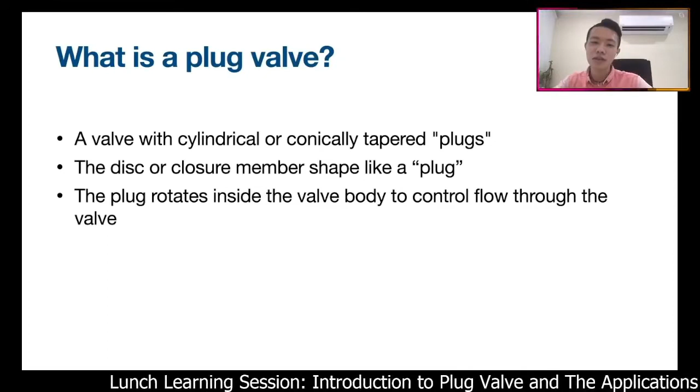Normally you see the closure member of a ball valve is a ball, a rounded closure member. So it's called a ball valve. Same for the plug valve, the disc is shaped like a plug inside. I will show the pictures later, hopefully you can have a clearer picture about that. The plug rotates inside the valve body, same as other valves, to control the flow through the valve.

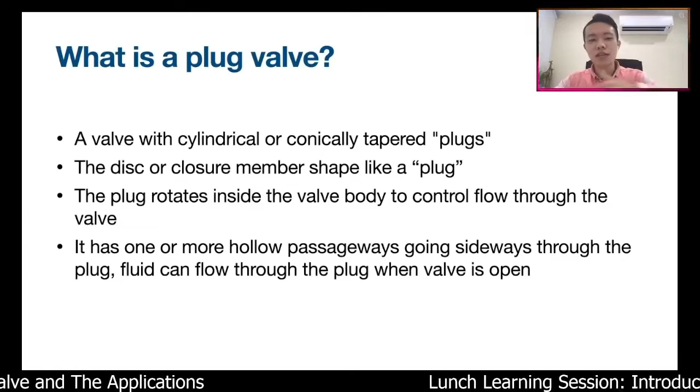The plug actually has a hollow passageway in it, going sideways through the plug. So when the plug valve is open, the fluid can flow through the valve, through the passageway. Okay, so let's have a look at how a plug valve looks.

Okay, let me just confirm that everyone can see. I see Wai Chong saying, okay, got the plug in the middle. Yes, that's correct. So now you can see there's a tapered plug in between. I don't think my pointer is showing. You can see from the cross section here, the plug valve has a plug as the closure member.

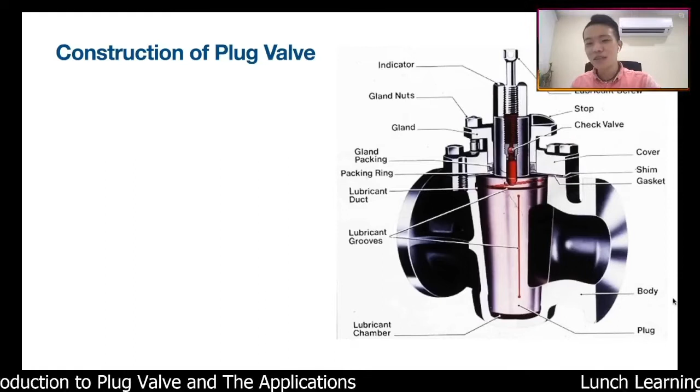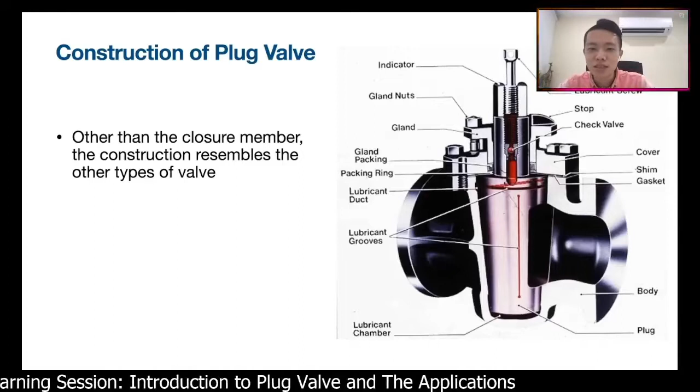Other than the closure member, the construction also resembles other types of valve. You can see here, the valve has the body, the stem attached to the plug itself, as well as the covers and the flanges. It's standard to all other valves. It consists of body, seats, stem, packing, and closure member, which we normally call the disc.

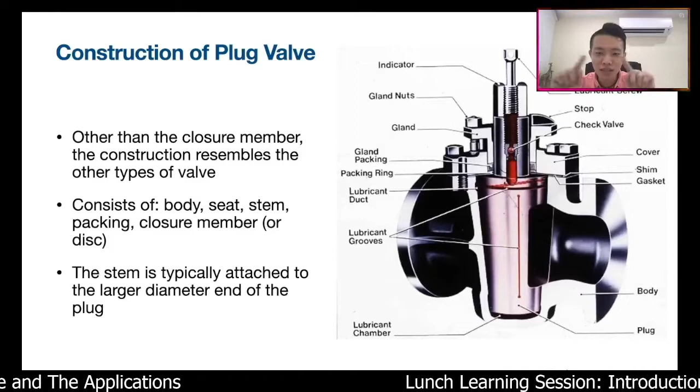The stem is typically attached to the larger diameter end of the plug. You can see the plug is tapered down the valve, so the stem is attached to the larger part of the plug itself. Okay. This should be a clearer picture so you can see it when the valve is open.

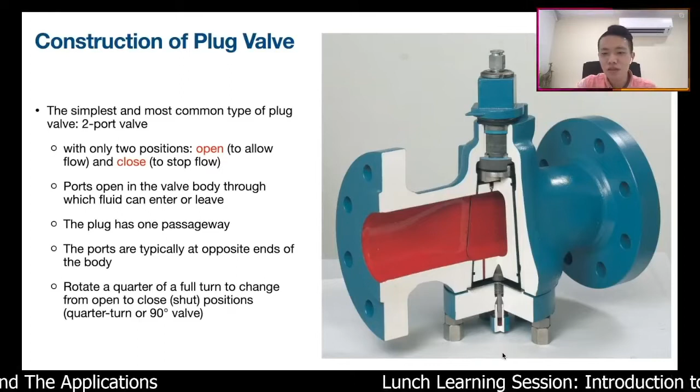The ports are typically at opposite ends of the body, meaning when there is a hollow passageway opening over here, there is another opening on the opposite side of the plug. Because the plug valve can only rotate a quarter of a full turn, it is what we normally call a quarter turn valve. A plug valve is a quarter turn valve, 90 degrees.

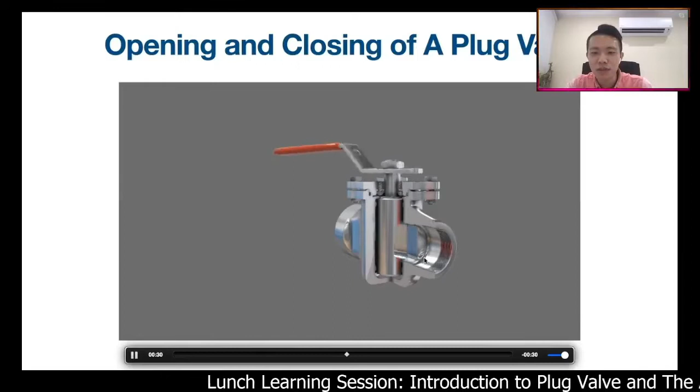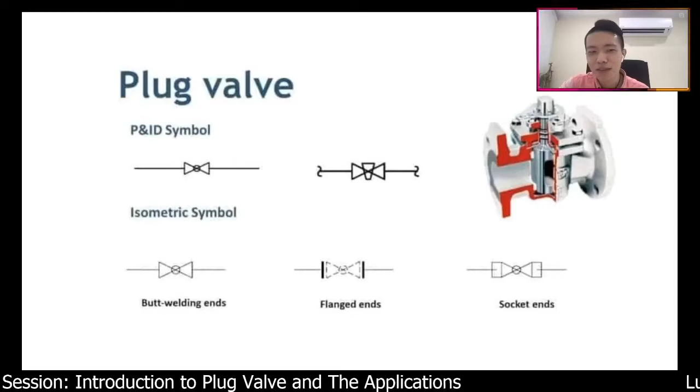Okay. So plug valve, how do you identify it from the P&ID? The symbol of the plug valve, as shown in the picture, has these two symbols, as well as the isometric symbols: butt weld ends, flange end, and socket weld ends. Just the middle of the symbol is a little bit different to differentiate it from the other valves.

Okay, let me see some comments. Okay, what's the port pattern in the plug valve? As I said just now, normally we see a rectangular port. It's rectangular like the first one, but actually there are other shapes, like diamond or round ports. So the rectangular port is the most common port that we can find in the plug valve.

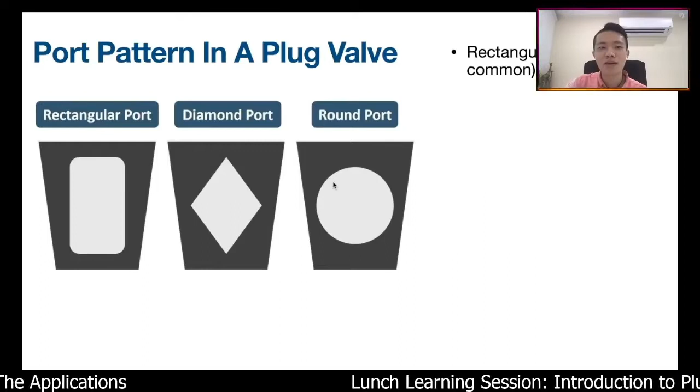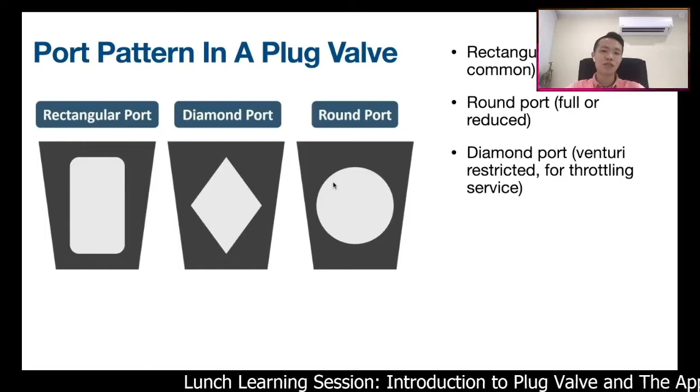After that comes the round port, full or reduced. The round port can come in a full or reduced bore. And of course, the diamond port, which is sometimes called a venturi port as well, which is venturi restricted. Normally, it's for throttling service.

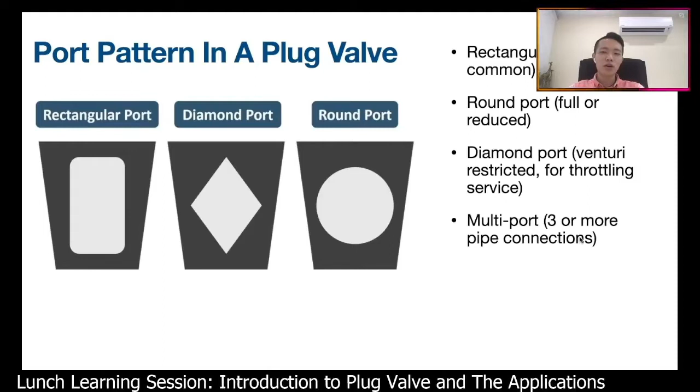Other than this, we also have multi-port. Just now we talked about the two-port valve. You see from the previous slide, it's a two-port valve. Actually, when there are 3 or more, we call it multi-port, which is for more pipe connections. You can see from here, 3-port or 4-port.

Okay. So just now we talked about different ports of the valves. Now we're going to talk about different types of plug valve. So what are the different types of plug valves that you know about? Anyone? Okay, the first one I already showed is a lubricated plug valve. If anyone can make a guess, what would the second one be? What's the opposite of a lubricated plug valve? Let me see. There could be a 15-second delay. So let's see if someone is able to give the second one. What comes after lubricated plug valve? The opposite is?

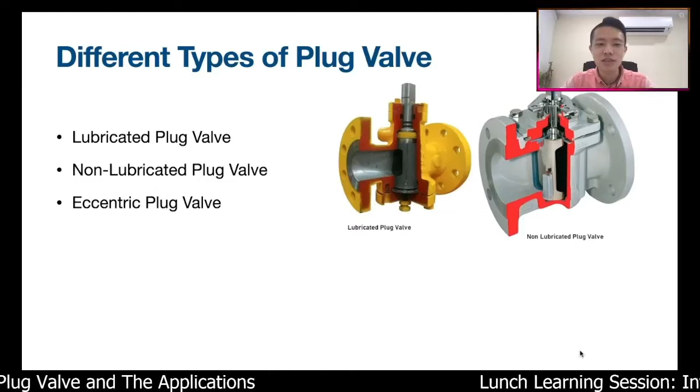Okay. The opposite is non-lubricated plug valve. You can see here, lubricated plug valve and non-lubricated plug valve. A bit later, I will describe them. You can see over here, the lubricated plug valve is much dirtier than the non-lubricated plug valve. Why so? Later I will explain. There are another two types of plug valves, which are the eccentric plug valve as well as the expanding plug valve.

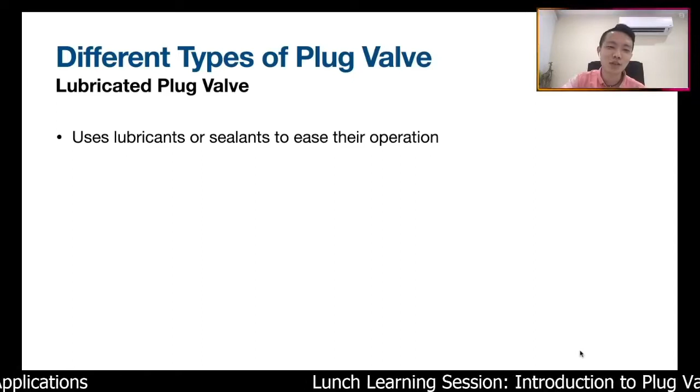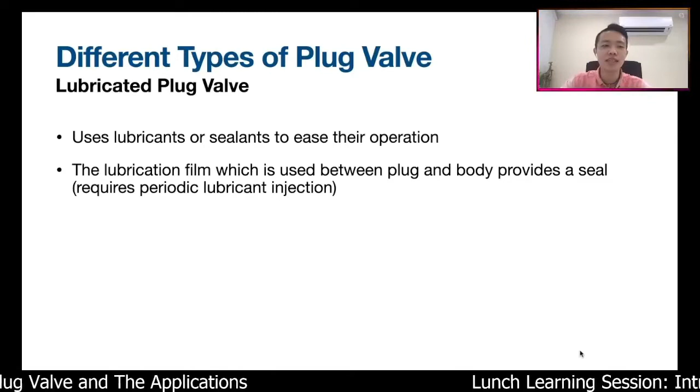So the lubricated plug valve, why would it be dirtier compared to non-lubricated? Because it's using a lubricant or sealant to ease its operation, meaning there's a lubrication film used between the plug and the body to provide sealing for the valve. Because every time this lubricant has to be injected into the valve, this is the reason the valve looks dirtier compared to a non-lubricated plug valve. This lubricant or sealant serves to protect the metal surface between the plug and the body, to avoid corrosion as well as to reduce friction.

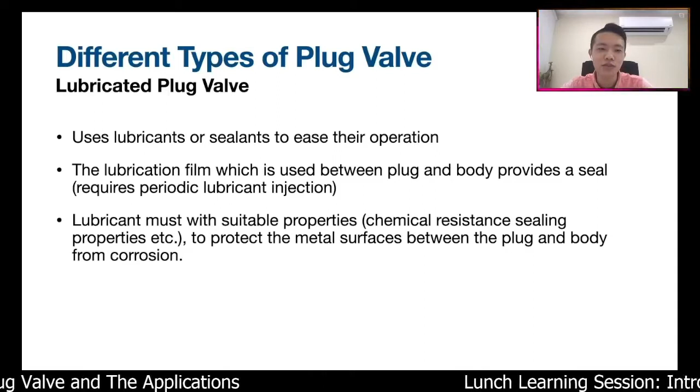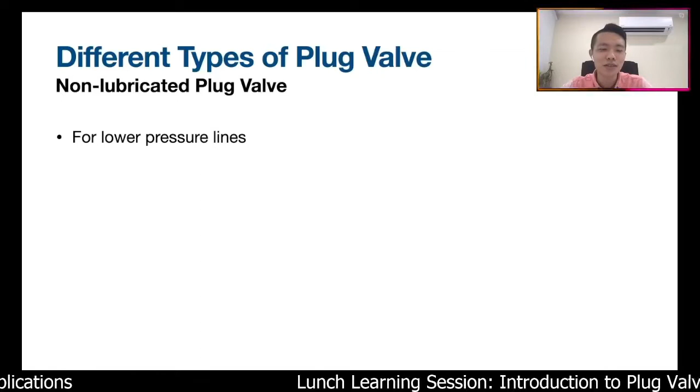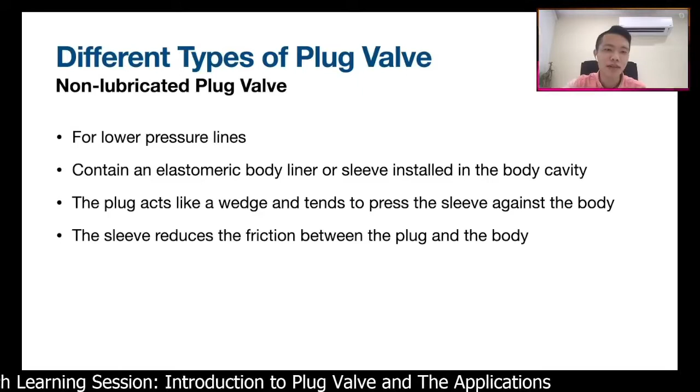The next one is, of course, the non-lubricated plug valve. So if the lubricated plug valve uses a lubricant to provide the protection, then how about a non-lubricated plug valve? The non-lubricated plug valve is normally for lower pressure lines, and they contain a thin elastomeric body liner or sleeve installed within the body cavity. The plug acts like a wedge and tends to press the sleeve against the body. And the sleeve reduces the friction between the plug and the body. So the lubricated plug valve uses the lubricant to protect the plug and the metal surface of the body, but the non-lubricated one uses the elastomeric liner.

Next one is the eccentric plug valve. I wonder why I don't have some pictures to show after this, so I could give a better explanation. But anyhow, it's fine. Let me see some of the comments.

Yeah, Wai Chong comments: wow, quite similar to a ball valve, just rotate 90 degrees to open or close. Correct. A plug valve is a 90 degree valve or quarter turn valve. Sim says the motion of a plug valve is similar to a ball valve. Any advantage or reason to select a plug valve compared to a ball valve?

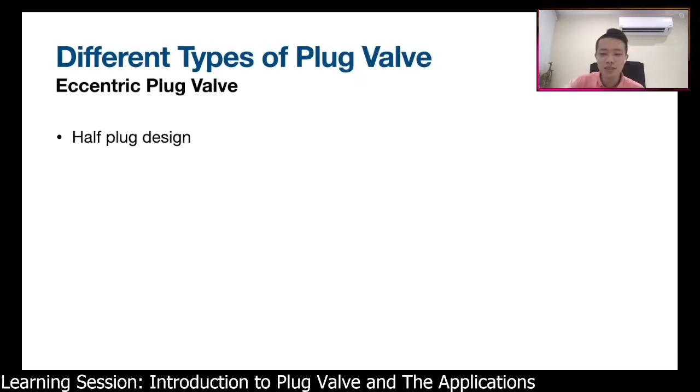I have a comparison, but I don't think there's a comparison of a ball valve and the plug valve itself. Let me see whether later on my slides we will have the explanation for this or not. Okay, before that, we continue with the different types of plug valve.

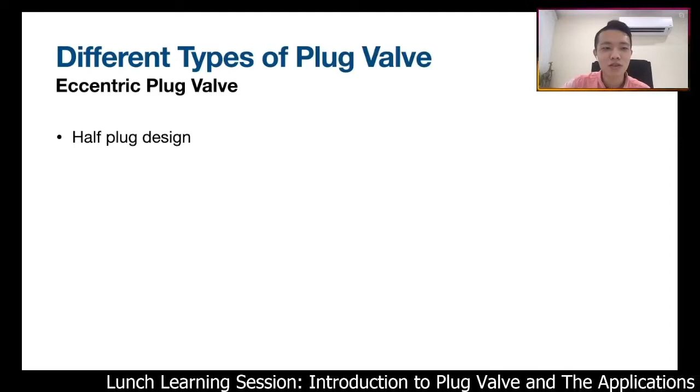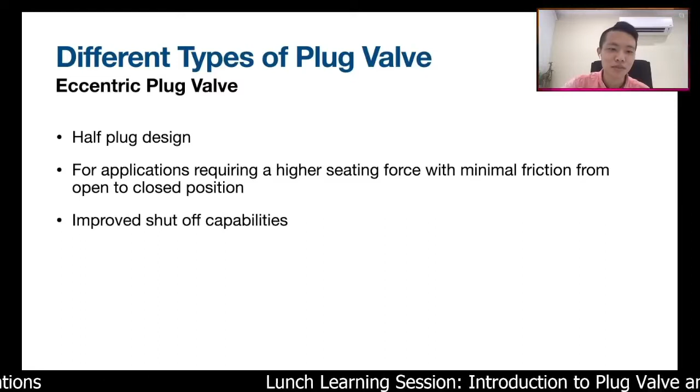The next one is eccentric, which is a half plug design, for applications that require higher seating force with minimal friction from open to close. And the eccentric plug valve actually has improved shut-off capabilities.

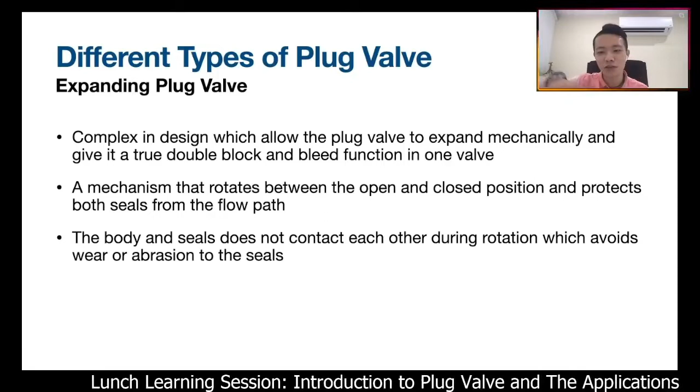Next one is the expanding plug valve. The expanding plug valve is more complex in design, which allows the plug to expand mechanically and gives it a true double block and bleed, or what we normally call a DBB valve. A mechanism rotates between the open and closed position and protects the valve seal from flow. This is what we call the expanding plug valve. The body and the seal do not actually contact each other during the rotation of the plug itself, to avoid wear or abrasion to the seals.

So next we go into the application of the plug valve. Sorry, I also just realized I have fewer pictures towards the end of the slides. I should add more pictures so that you all can have a better understanding rather than just the words.

Okay, so application of plug valve. What is a plug valve used for? It's suitable for services such as air, gas, vapor, used in slurry or sewage systems or mineral oil, even for oil piping systems. It's also suitable for vacuum and high pressure applications, even though they are usually used in low pressure or low temperature service, as we just said.

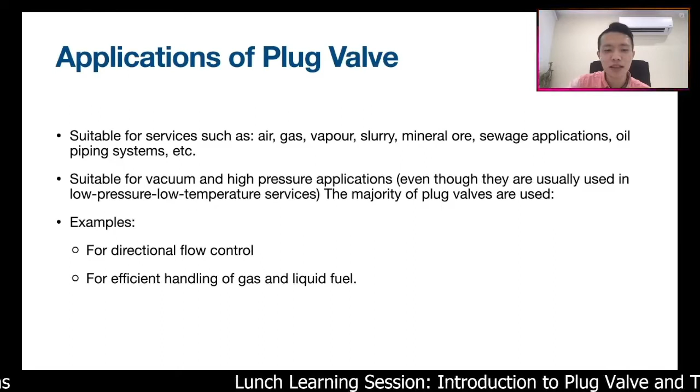The majority of plug valves are used in, for example, directional flow control, efficient handling of gas and liquid fuel, as well as safely handling extreme temperature flow, like valves used for boiler feed water or condensate.

Let me see. Are there any other comments popping up? Okay.

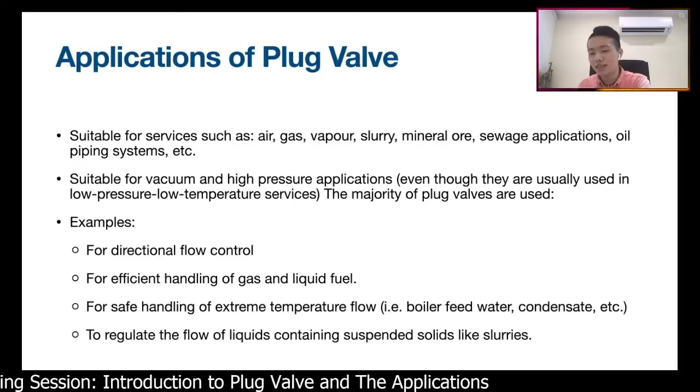Other than that, the plug valve is also used to regulate the flow of liquids which contain suspended solids like slurries. Now I'm talking about the advantages of plug valves. Hopefully this answers Mr. Sim's question, but let me see if what I've prepared directly answers the question.

Okay, so what's the advantage of a plug valve? First of all, it's a very simple design with fewer parts, actually the same as a ball valve. And it's also fast action from open to close or from close to open. Meaning you just make a 90-degree turn and it goes from fully open to fully closed or the other way around. Inline maintenance is also possible, meaning the operators don't need to have their production interrupted when they want to do maintenance on this plug valve.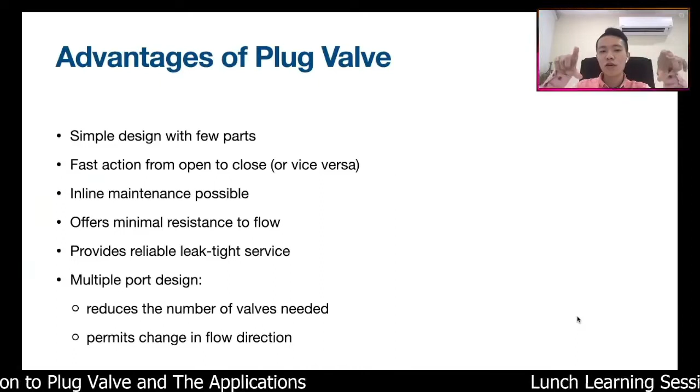They also offer minimum resistance to flow. But some of them want to reduce the flow, so they will use a reduced port. Just now we saw there is a full bore or reduced. If you don't want resistance to the flow, you can just use a full bore. Plug valves also provide reliable leak-tight service.

And the multi-port design actually reduces the number of valves needed. Just now you saw there's a 3-port or 4-port. So when you want to divert your inline input of the flow into several outputs or several downstreams, a multi-port plug valve can serve that function. Otherwise you need piping bent here and there to achieve the several downstream flows.

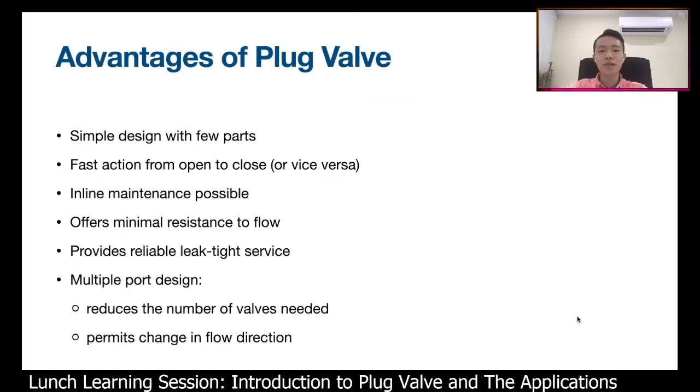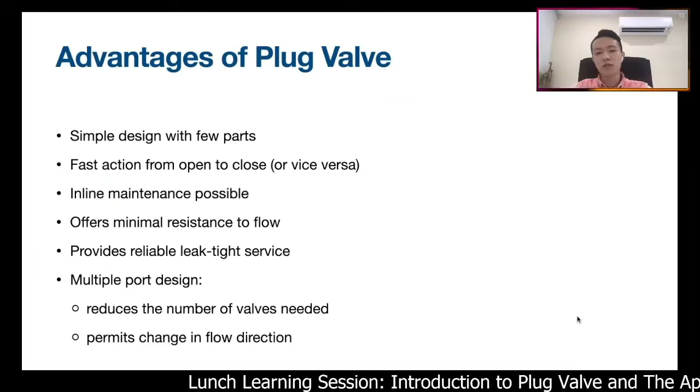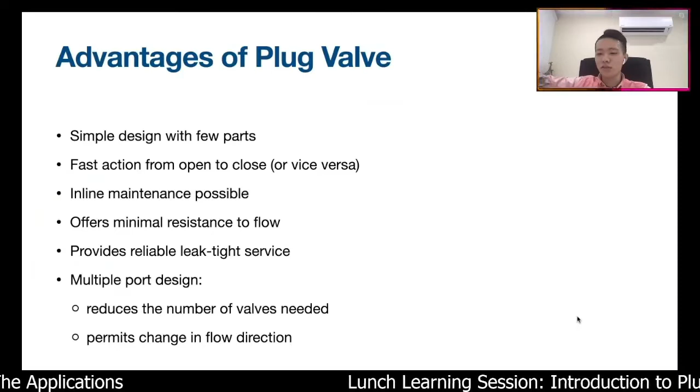But using a multi-port plug valve, you can get rid of the larger number of valves. It also permits change in flow direction. So when it flows in, it can change by 90 degrees, or you want it to flow straight at 180 degrees, or even divert it to 270 degrees.

So what's the disadvantage of a plug valve? Let me see. Can a plug valve operate using an actuator? Yes, a plug valve can be operated using an actuator.

Okay. So what's the disadvantage? Well, you see some questions coming up. It requires greater force to operate due to the comparatively high friction.

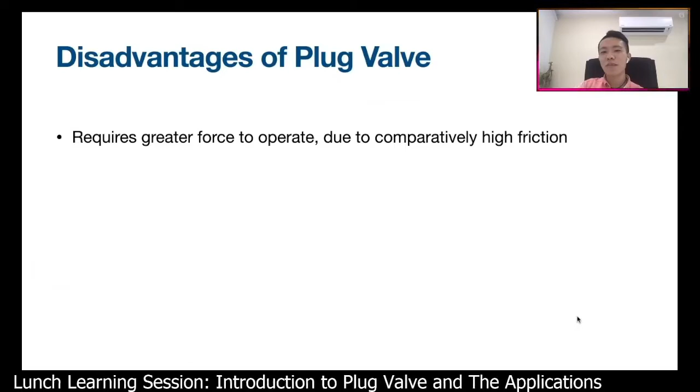Okay, less preferable for throttling service. Because the plug valve is possible to cause inappropriate lined material or lined release area, resulting in the swelling of the PTFE liner. This inappropriate lined material release, when the PTFE liner swells, will cause damage to your packing or the soft parts of your valve, which will cause more frequent maintenance.

Okay, you are asking about the advantage or reason of selecting a plug valve compared to a ball valve. So no, actually, because you see the disadvantage here, if talking about the same size, same functions, same pressure class, same materials, the plug valve actually costs higher compared to a ball valve. So I think that's the reason why in the market you can see that ball valves are more commonly used instead of plug valves.

You don't normally see people asking for a plug valve for 1 or 2 inch. But maybe close to the boiler feed water, those with high temperature, a plug valve will be a better choice. But it's really subjective, I would say. If the user is looking at a long duration, meaning they are more looking into the OPEX, they will opt for the plug valve because it's more economical because of its reliability.

And when you look into the total cost of running the valve, the plug valve actually has a lower cost compared to a ball valve. A ball valve, yes, maybe in the beginning is cheaper in price, but later on it will have higher maintenance costs.

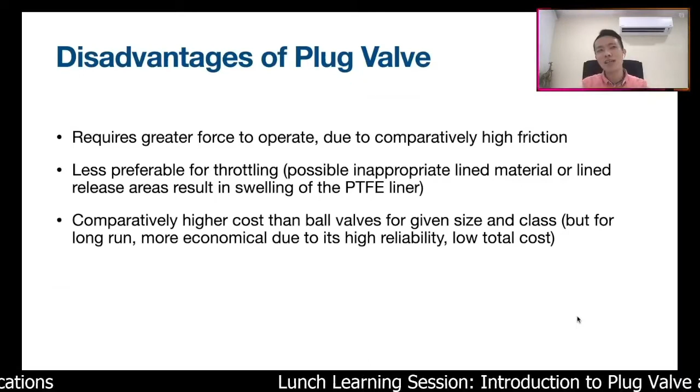and I just gave a really brief one. Actually, we could go into more detail on what a double block and bleed valve is, the working principle of the expanding plug valve, how their design is, and why the plug valve is less preferable for throttling, the real fluid mechanics in the mechanism itself. But I tried not to go very deep. Today I just want to give a very simple idea of what a plug valve is.

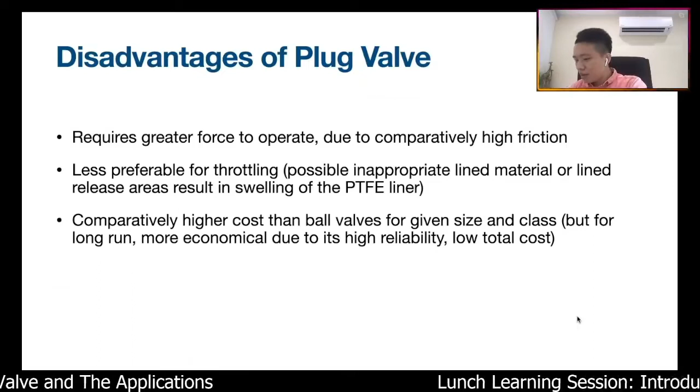Okay, I don't see any question. Because we are towards the end, are there any other questions? Another 1 minute? If not, then I might want to finish there. Let me see if there is any.

Okay, I believe there is no specific question because today's is very simple and straightforward: what a plug valve is, why people call it a plug valve, how the construction is and how many ports it has. Maybe 2 ports, rectangular, diamond shape, round shape. For the round shape, they have the reduced port and the full port, as well as the advantages and disadvantages of the plug valve.